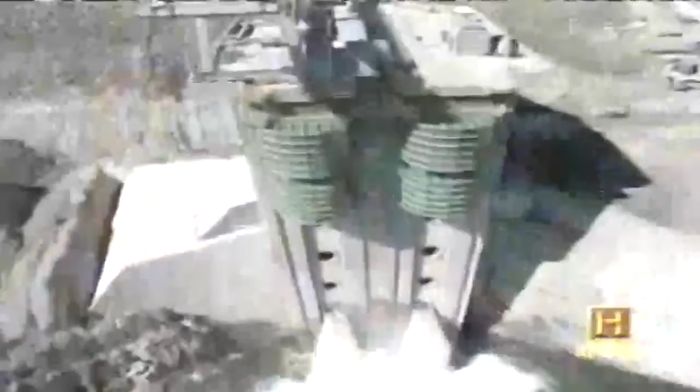When most Americans turn on a faucet, they expect clean, pure water to flow out. They also expect their city to have plenty of water for industries, for fighting fires, and for cleaning streets. Public water supply systems in the United States provide all those things for 99% of the population, over 250 million people. Water supply is empowering. There are so many things that can happen when you have a water supply, and so many things that don't happen when you don't have one.

On average, Americans use about 100 gallons of water per person every day, and public waterworks in the U.S. supply about 40 billion gallons daily. It truly is an invisible empire.

There are thousands of miles of these aqueducts and tunnels all underneath the city, crisscrossing and moving. There's very little space down there. They've built so much. The men who built the skyscrapers up have really built the skyscrapers down. Some of the technology used in today's city water systems has been around for millennia.

Sanskrit writings from 4,000 years ago talk about the importance of purifying drinking water and describe various methods, including boiling over a fire and filtering through sand or charcoal.

2,700 years ago, qanats—sloping tunnels carrying groundwater—were being used in northwestern Persia. The qanats are basically horizontal wells used for irrigation. These were developed originally in the area mainly what's today Iran, and spread throughout the area into places like Spain and parts of China.

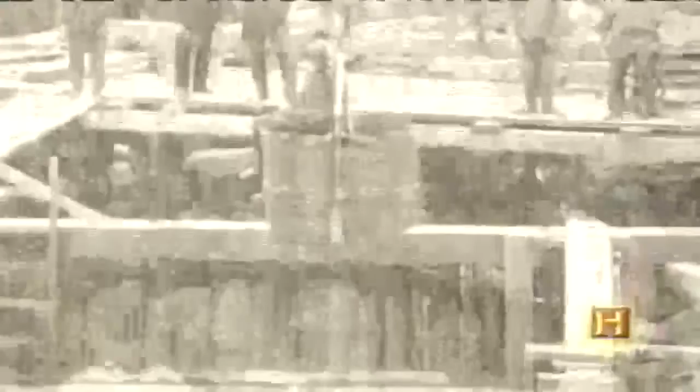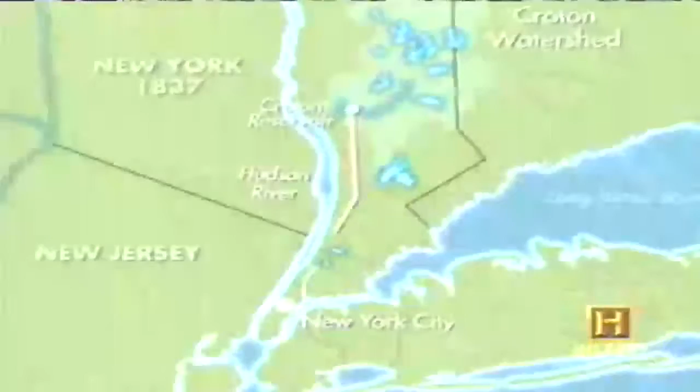In 1837, construction began on the Croton Aqueduct, which still carries water to New York City today, providing about 10% of the city's water supply. The 30-mile-long brick pipeline, extending from the Croton Reservoir along the east bank of the Hudson River to downtown New York City, took 5 years to complete, with up to 4,000 laborers on the job at one time.

In 1842, when the aqueduct finally went into service, President Tyler and former presidents John Quincy Adams and Martin Van Buren came to the Big Apple for the opening ceremony and watched water gush for the first time from the Croton Fountain near City Hall.

People recounted in elaborate fashion their first bath, their first shower. Things hard to imagine what it was like to be able to go into your house, turn on a tap, and have water. The Croton Aqueduct was considered an architectural marvel.

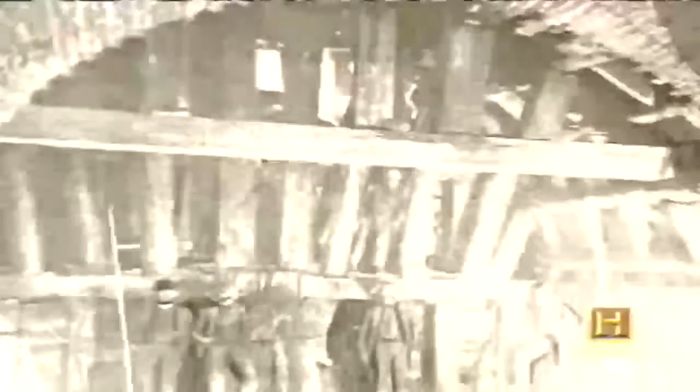Most of it was an 8 by 7 foot arched tube of brick and stone, buried 15 to 30 feet beneath the ground. But there were elevated sections like the High Bridge, an arched brick overpass that took the aqueduct across the Harlem River to Manhattan. It became a popular tourist attraction in the late 1800s, with sightseers traveling 8 miles from the city to stroll across the 1,400-foot-long span.

Then, as always happens, because of the supply of water, because of the nature of New York City, the city quickly expanded, and already within 12 years, there was an editorial in the New York Times saying, we need more water, we need more water. When you think of the immigration that was occurring in the end of the 1800s, New York was just exploding, and that Croton network just wasn't able to meet water supply demands.

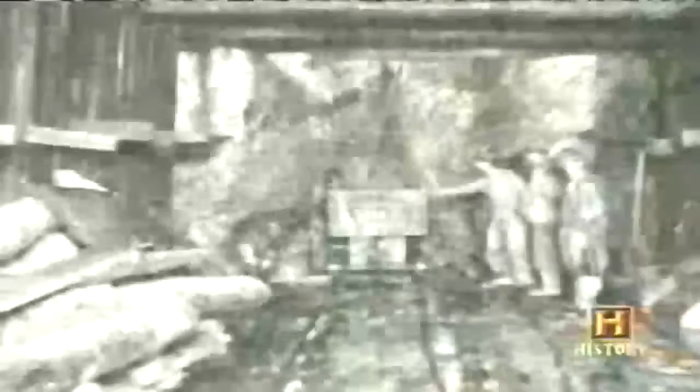And this time, they looked even further afield, and their plan and vision was even bolder. They decided to build an aqueduct all the way out to the Catskill Mountains. The new aqueduct from the Catskill Mountains would be 92 miles long, 3 times as long as the Croton Aqueduct. It would run down alongside the Hudson River and at one point cross the river. This is another hand-built aqueduct.

This was the working man down there with sticks of dynamite and steam locomotives and mules hauling all that rock out.

With the Croton Aqueduct, they decided to cross the river in the aqueduct above the river. With the Catskill Aqueduct, they decided to go beneath it.

For over a year, they would sit on these boats pitched in the river, often in storms and rain, trying to do soundings, trying to literally lower things down to figure out where the bottom of the river was so they could decide how far they had to dig down on the banks to get underneath it. At one point, engineers raised their hands in frustration and said, this river's bottomless.

But eventually the city's engineers did find the bottom of the river and made the daunting discovery that they would have to tunnel at a depth of 1,200 feet to get to the solid and stable bedrock beneath the river. It was a task that seemed impossible, but they would have to find a way.

What they didn't know is that the system they were building had an Achilles heel, a potentially fatal flaw that has New York City engineers worried today.

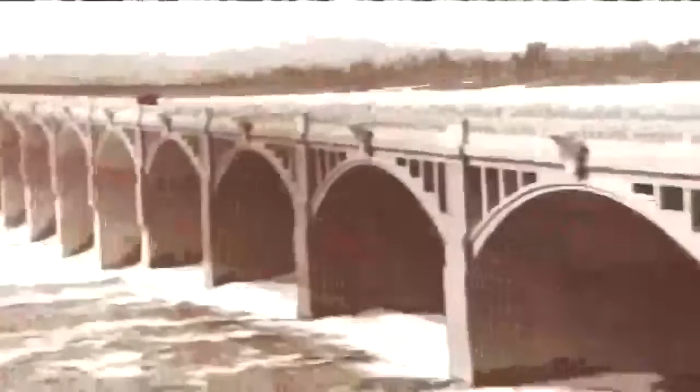When New York City water engineers set out in 1907 to build a new aqueduct from the Catskill Mountains, one of the most difficult challenges was digging a tunnel deeper than they had ever dug before. In order to cross underneath the Hudson River, they would have to tunnel at a depth of 1,200 feet, nearly as deep underground as the Empire State Building is high. So it gives you some sense of scale of how enormous the engineering was to do this.

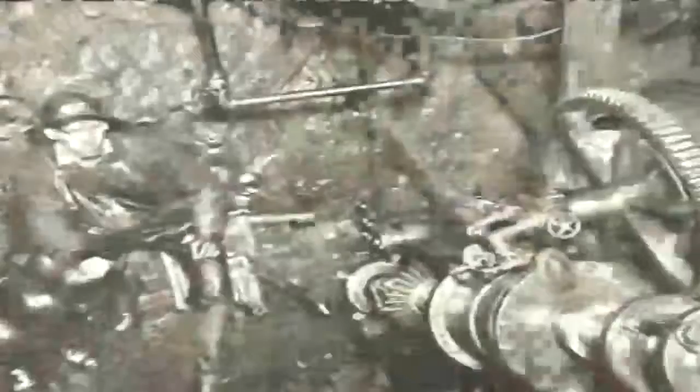So what they did is they started to dig from both banks, literally from the sides, and they began to dig like an inverted triangle coming down until the two sides literally met 1,200 feet beneath the river, almost like a pincer.

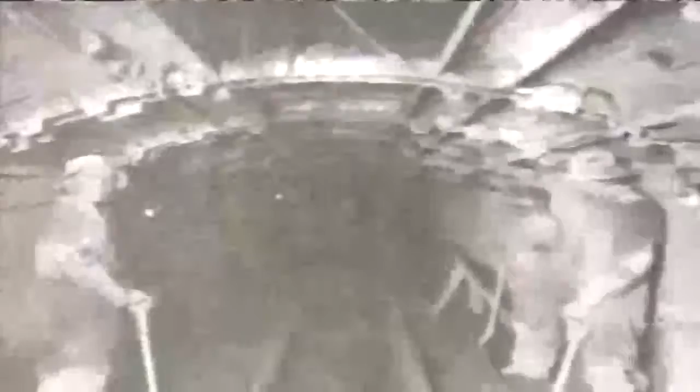After crossing under the Hudson River, the new aqueduct would flow into City Tunnel Number 1, a huge new tunnel that would run the length of Manhattan, 900 feet deep. Work on the 18-mile-long Tunnel Number 1 began in 1911 and went on for 6 years. When completed, it would be the longest tunnel of its kind in the world, capable of carrying 500 million gallons of water per day.

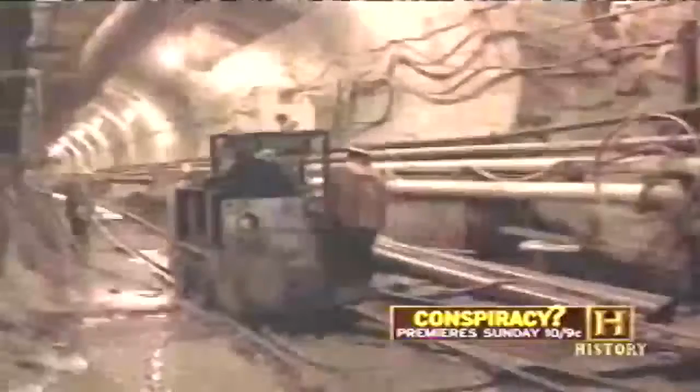The workers of Tunnel 1 were members of a proud profession that continues to build the New York City water system today. Known as sandhogs, they've been laboring underground, unknown to most New Yorkers, for decades. They got the name from their work in the sandy bottom of the East River, laying foundations for the Brooklyn Bridge.

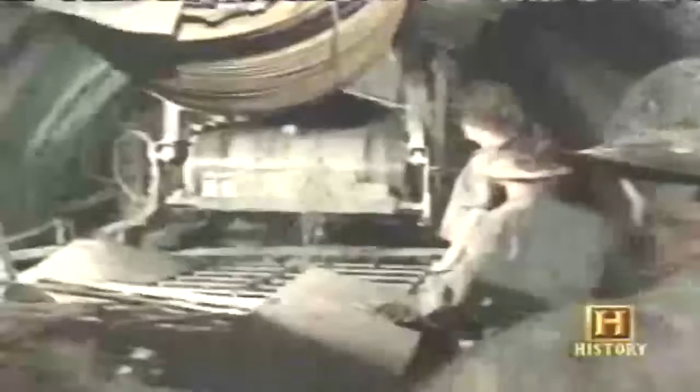Starting at the absolute bottom of the economic ladder, it was the hardest, toughest, in a sense, most dangerous job out there that you could find. Fathers passed on those job opportunities to their children, and a culture grew out of that.

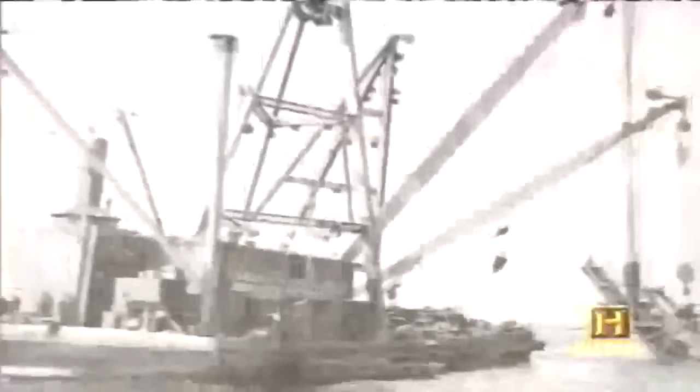Construction of the 11 to 15-foot diameter tunnel was particularly dangerous where it crossed the East River to carry water to Brooklyn. Natural groundwater made the ground so soft that the shafts in which workers descended to the tunnel became watery death traps. Every time they would dig, the soil would cave in on top of them.

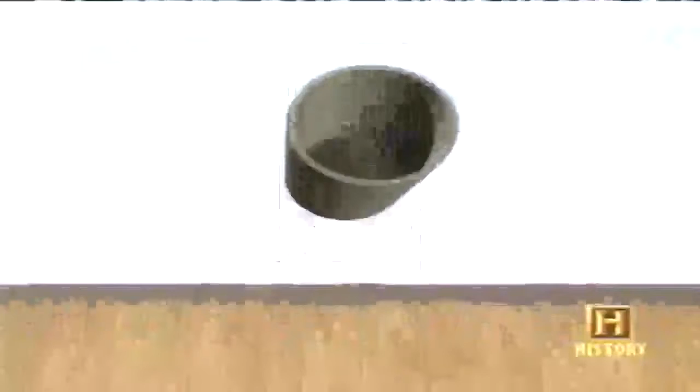So what they decided they needed to do was to sink something called a caisson. Pneumatic caissons filled with pressurized air had been used earlier in the building of the Brooklyn Bridge. These concrete and steel structures weighed about 2,000 tons each. They were sealed on all sides except the bottom, and as they were lowered into the soft ground, compressed air was pumped in, pushing out the mud and water.

That pumping of the air created a real safety health hazard because it created an environment where the workers would get the bends, so they were only allowed to be down there for 2 hours. The bends, also known as caisson disease, can happen when pressure on the body is removed too quickly, causing the formation of nitrogen bubbles in the blood and tissues.

Sometimes the intense air pressure would cause a dangerous blowout in the walls of the caisson. It was basically a high, shrill, kettle-like screeching, which would echo in the caisson. It meant there was a rupture in the lining of the caisson wall, that the air was now escaping, created an incredible suction, and everything in the tunnel was going to be sucked towards this small opening.

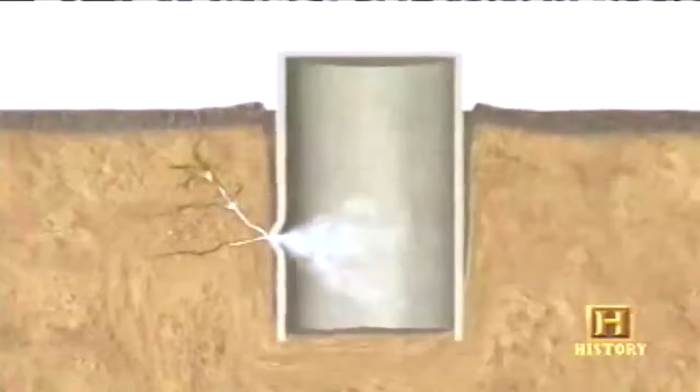Because of the pressure, the opening could widen very quickly, and everyone would drop their picks and run. Most of the concrete-lined Tunnel Number 1 had to be blasted through solid rock. During the first 3 years of construction, 10,000 pounds of dynamite were used daily.

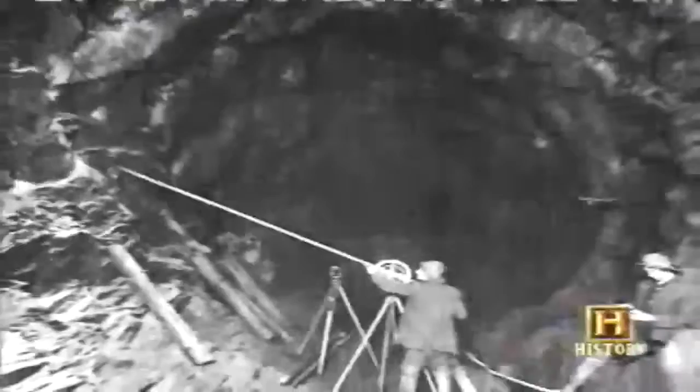By the end of 1912, a total of 2.5 million pounds of dynamite had been used, and 14 workers had died in blasting accidents. The tunnel was finally finished in 1917, and a lavish opening ceremony was planned at a fountain in Central Park. Entitled The Good Gift of Water, the pageant had to be canceled because of rain.

Tunnel Number 1 was an engineering triumph, but for a city growing as fast as New York, it would be inadequate within a few years. Over the next decade, population expanded eastward from the Bronx and Manhattan, and by 1929, water consumption was 35 million gallons a day higher. Construction began on Tunnel Number 2 to supply Brooklyn and Queens.

The tunnel would be fed by a new aqueduct from the Delaware region. It connects with City Tunnel Number 2, which, together with City Tunnel 1, delivers all of New York's water to 8 million people in New York City. Obviously, they are of crucial importance. Without one or the other, half the city would be without water.

In the 1950s, New York City water engineers made a disturbing discovery when they tried to shut down a section of City Tunnel Number 1 to inspect it. They had built valves in the bottom of shafts, and these valves they would literally turn — they would almost look like a steering wheel on a submarine, sticking out of a hatch. So in 1954, the engineers go down and start to turn the handle.

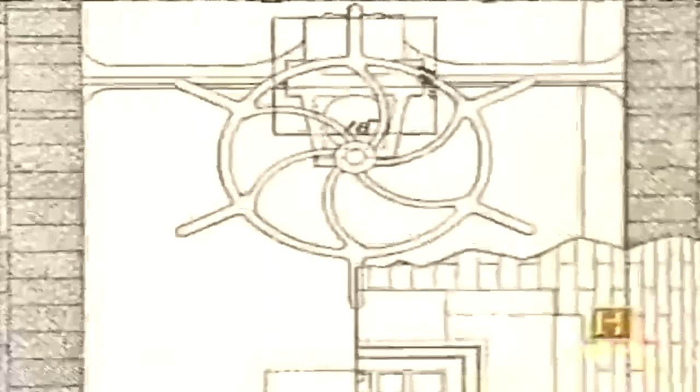As they start to turn the handle, it begins to tremble, begins to shake. There's too much pressure on it. It's too old, the valve's corroded. They can't shut it off. They couldn't repair it, they couldn't even find out if it was about to burst or break. It scared the bejesus, as one engineer told me at the time, out of everybody.

If you lose this system, something that New Yorkers take for granted day in and day out, you'd have a very different New York City without water. And that is a daunting challenge, one that makes the third water tunnel so critical. City Tunnel Number 1 has been in continuous use without a shutdown for inspection or maintenance for well over 100 years. Hundreds of sandhogs are now fighting a crucial battle to complete a new tunnel as quickly as possible.

There's no way to bring water to Lower Manhattan or from 59th Street down without Tunnel Number 1. Once we finish constructing the third water tunnel, we'll be able to turn off the first water tunnel, get in there, and look at what its engineering challenges are for something that's 100 years old.

People forget everything breaks at some point. A 100-year water tunnel at some point starts to fail, and you're now seeing the kind of snap, crackle, and pop within that system. Some of the sandhogs building Tunnel Number 3 believe the only thing preventing Tunnel Number 1 from collapsing is the pressure of the water pushing against its walls.

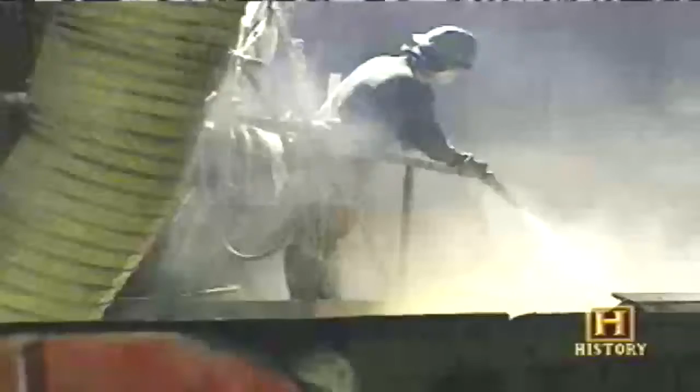One of the engineers and contractors told me, probably more starkly than anyone else, that what nobody knows is that we're facing a potential apocalypse. Those were his direct words. And so once again, an enormous project began, in 1970. It became, for those who understood it, a race against the clock.

No one understands that race better than the sandhogs of today, who are building City Tunnel Number 3, many of whom come from a long line of tunnel workers. My uncle, my cousin, they were all sandhogs, and then you join with them. I've been a sandhog for 27 years. When I went down there the first time, it was exciting — I said, wow.

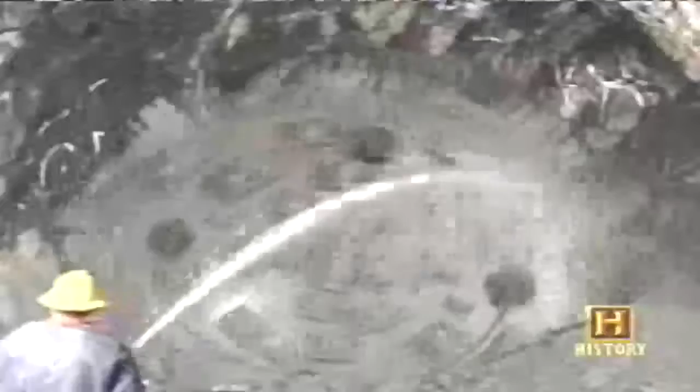Sandhog Scotty Chessman has a PhD in geology. After working as a geologist for the city, he decided to go back to the job he loved best. When you get down there, it's the root core of the Appalachian Mountains, anywhere from 1 billion years ago to 400 million years ago. You see a beautiful cross-section of what it was like — the physical activity that took place, the deformation, the heat and pressure, and the imprint on the rock.

And it changes as you go along. You know, it's almost a PhD thesis every 100 feet.

The 60-mile-long tunnel number 3 will extend from Yonkers through the Bronx down to the southern tip of Manhattan, and then over to Brooklyn and Queens. Longer, wider, and with more sophisticated control systems than its two predecessors. Its construction ground to a halt for nearly a decade after New York City went bankrupt in 1974, and it's not scheduled for completion until 2020.

It's being carved out by a gigantic machine, similar to the one that dug the Channel Tunnel from Britain to France, called a TBM, or tunnel boring machine. It has a large head, 13 feet roughly in diameter, with a bunch of cutters on it, and they press up against the face at 1.5 million pounds of thrust, which comes out to roughly 65,000 psi per cutter.

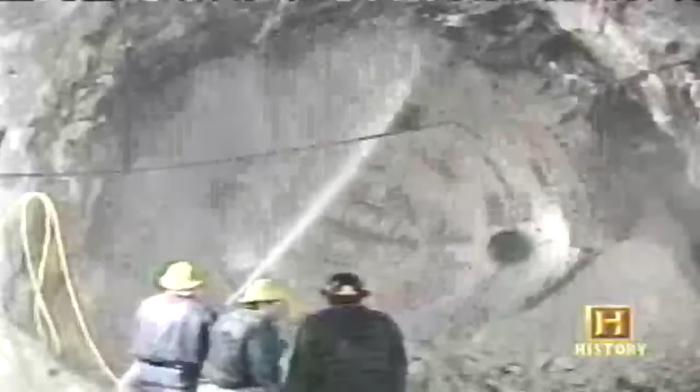This tunnel boring machine has these large grippers. It locks out on the wall. It has these large hydraulic cylinders that push the head forward, and the head rotates and presses on the face and creates these chips.

As the TBM moves forward, it's up to the sandhogs to clear out the chipped rock it creates, which is called muck.

Now this is the actual muck. This is the last conveyor of the system, you see. And it's muck. You can see some chips in it, but it's pretty finely ground. So the muck you're seeing right there probably came from the heading 8,000 feet ahead of us, probably 20 minutes ago.

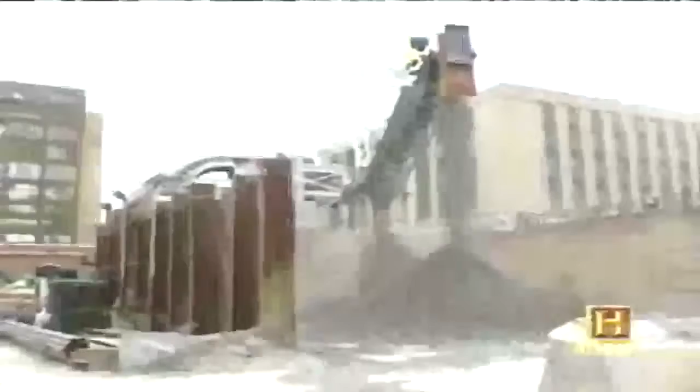Whenever the sandhogs prepare to descend to their workplace deep beneath the city, they're aware of the dangers involved, and that awareness keeps them alive. Five guys that I've worked with have been killed on the job, and then here, a lot of guys have been maimed, and it's sad that it happens. I don't want it to happen to me, and they didn't want it to happen to them, but sometimes things happen. Safety's a big issue. Everybody wants to go home.

There's always one last thing to do before getting on the elevator for the 600-foot trip down. This is a check-in, check-out board. It's an OSHA requirement. If there's ever an accident down there, we'd like to know how many people are down there, in case you have to rescue anybody. So it's a requirement that you flip over your tag. As I'm going in, I'll flip over my tag for red, and that indicates that I'm in the tunnel.

24 sandhogs have died in the construction of tunnel number 3. Some believe they may have given their lives to prevent a catastrophe. If one of those systems collapsed over the next 20 years, it would be a disaster of mega proportions that would overshadow all the disasters combined. It would truly be a calamity.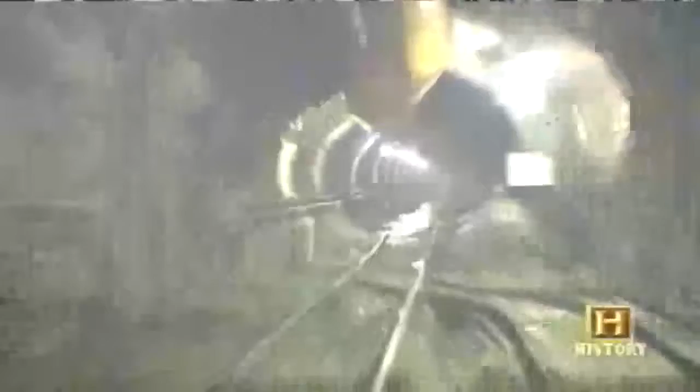The stakes are as high as they've ever been. They're as high as they were in the 1830s. People just don't realize it because the water is still flowing. While we're building the third water tunnel, we definitely and unequivocally do not expect catastrophic failure in the near term. But if you don't do it now and you don't start building it now, it's definitely not going to be a place where that risk is really facing the city.

The city of Chicago has never had to look far for its water supply, since it's situated on one of the Great Lakes. But it did have to build the largest purification plant in the world to keep its drinking water clean.

New York City residents consume an average of 1.1 billion gallons of water a day. That's about 300 million gallons less than in 1988, when the city launched a major conservation campaign.

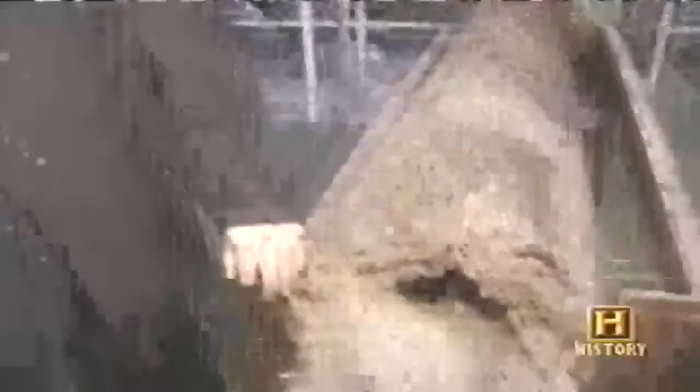This is a wood water main, which we estimate to be over 100 years old. It's typical of what it was prior to 1850. This one appears to be coated with some type of tar, which would probably be typical of what they would do when they installed them.

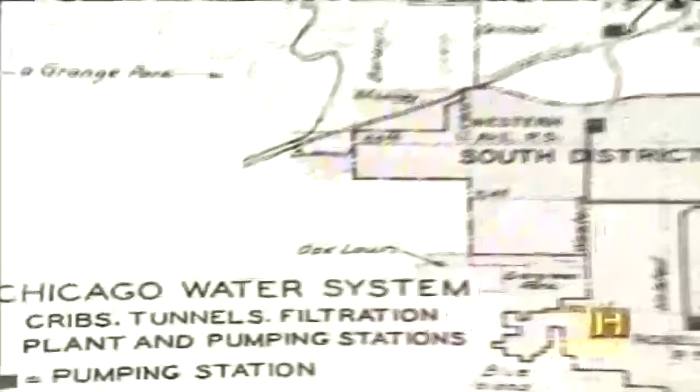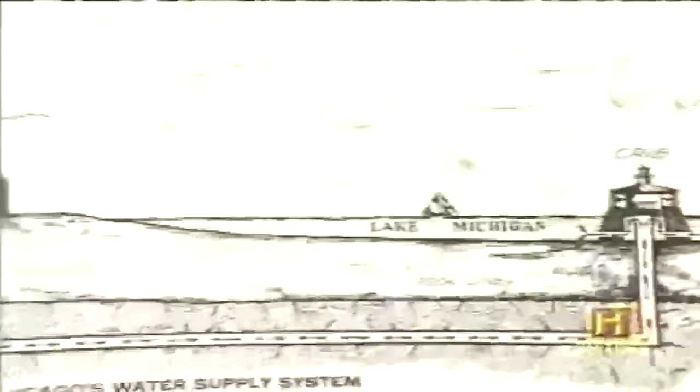In 1864, the city started construction on an engineering project that made headlines around the world: a tunnel that extended 2 miles out into Lake Michigan, the longest tunnel ever bored up to that time. The tunnel was dug through clay 60 feet below the lake's bottom and was lined with brick to a finished diameter of 5 feet. A pentagon-shaped wooden building called a crib, which would protect the intake shaft from ice and the elements, was built onshore, towed out into the lake, and sunk to the bottom.

The term crib came from the wooden pilings which were sunk into the lake bed. 30 years later, the wooden building was replaced with a brick one, but the term crib remained, and the Carter Harrison crib is still there today. The Chicago Water Department tug, which is also an icebreaker, makes regular trips to maintain it.

Modern Marvels went aboard with Richard Rice, the head of the Chicago Water Department, for a trip to the Harrison crib, which looks much as it did when it was built over 100 years ago.

Plaster walls, wood trim. We have living quarters for about 19 individuals who may be out here at any given time during the year to do work.

In the early days, there was always somebody at home at the crib. We actually had a crib tender - that was actually a title in our budget, a crib tender who lived here 24 hours a day. Rumor has it that they had the best meals in town cooked out here.

The shore end of the tunnel was connected to a new pumping station that opened in 1869. It had the capacity to pump 18 million gallons a day, which was 60% more than the city needed at the time.

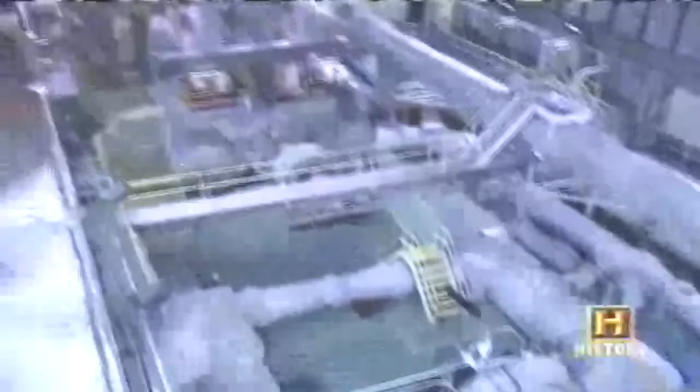The Chicago Avenue pumping station is still an essential part of the downtown water system, with a total of 6 working pumps that can produce 200 million gallons a day.

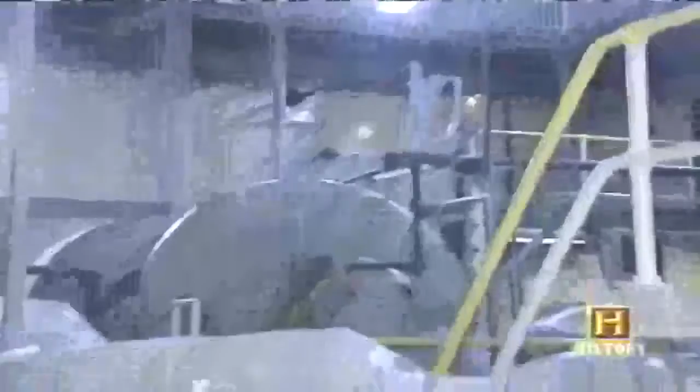The original pumps were steam-driven. We've converted and modernized the station. These are one of our older electric pumps. This pump that we see here will be pumping 30 million gallons per day.

The Chicago Avenue pumping station, which now includes a restaurant and a theater, and the historic water tower across the street, have become major tourist attractions in downtown Chicago.

For a while, the 2-mile-long water tunnel under Lake Michigan provided an abundant supply of clean, fresh water for Chicago. But as the city grew, tanneries, glue factories, and other new industries belched effluent directly into the Chicago River, which was already polluted with sewage. By 1890, Chicago sewage was flowing all the way from the Chicago River to the intake crib 2 miles offshore. Chicago was hit by outbreaks of dysentery and typhoid.

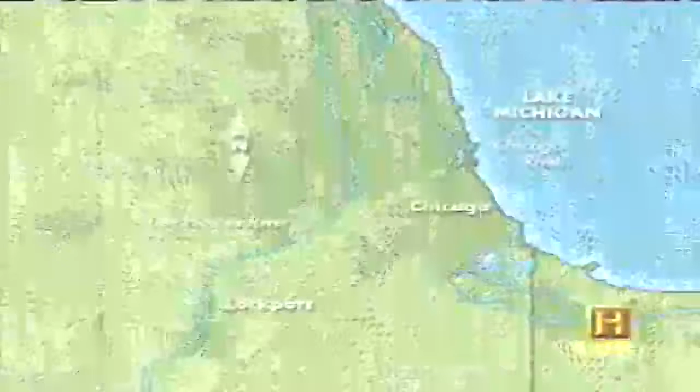To keep pollution out of the lake, the city broke ground in 1892 on the largest earth-moving project of its time, the 28-mile-long sanitary and ship canal, which was larger than the Suez Canal in Egypt. The canal reversed the flow of the Chicago River, making it the first river in history to flow away from its mouth.

8,500 laborers used mule-drawn plows, steam shovels, and dynamite to move nearly 30 million cubic yards of earth. Reversing the river's flow led to a dramatic reduction of pollution in Lake Michigan, and by 1908, Chicago's typhoid rate had dropped 91%. Chicago eventually built more intakes in cribs to bring water from Lake Michigan.

They include the still functioning Dever Crib, located beside the old Harrison Crib, and connected to it by a steel walkway. In 1935, the Dever Crib was completed, and that was actually a 16-foot concrete-lined pipe that actually is beneath the floor of Lake Michigan at a depth of about 150 feet.

The Harrison Crib, taken out of service in 1998, still serves as the living quarters for maintenance crews working on the Dever Crib. As Chicago's population grew, a large purification plant became necessary. The Jardine Purification Plant, designed to filter and treat more than 1 million gallons of water per minute, was completed in 1964. It's the largest water treatment plant in the world.

Huge pumps bring lake water from the Dever Crib into the plant, where it goes through a vast system of sand and gravel filters to remove impurities, called particulate. Each one of these filters is a conventional rapid sand filter. It's basically a couple feet of gravel topped by a couple feet of sand, and the water travels through the sand and is filtered. It will trap most of the particulate on the top.

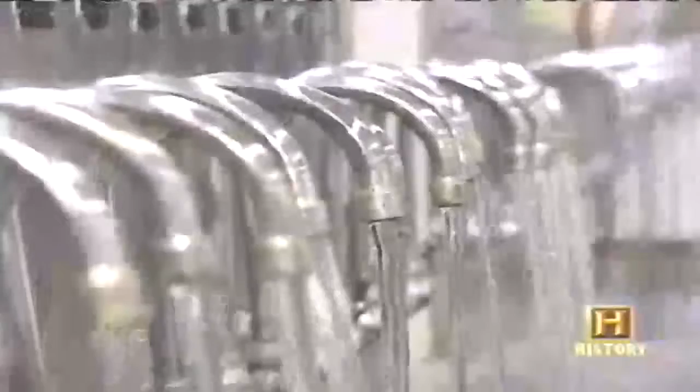In the plant's testing laboratory, technicians perform numerous tests to monitor the quality of the water 24 hours a day, 365 days a year. Millions of samples are taken at the plant every year to ensure that the water meets the standards of the Safe Drinking Water Act.

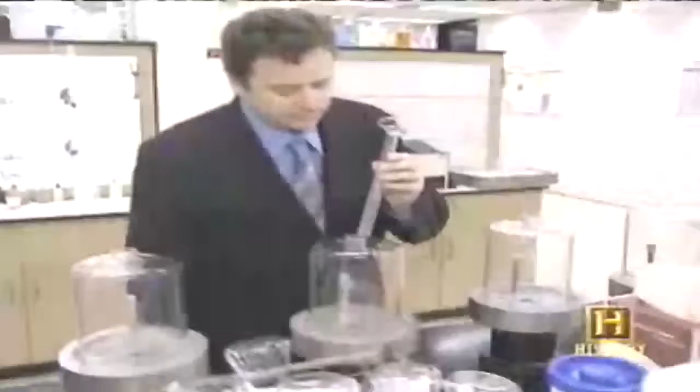The incoming raw water is also monitored for unpleasant tastes or odors. With the odor monitors, we basically use the human nose. In raw water, you may smell an earthy smell, you may smell a fishy smell, you may smell a moldy smell, you may smell a chemical or a phenol smell.

If the water fails the sniff test, the Jardine plant will add powdered activated carbon, which can remove tastes or odors. Tiny carbon particles are extremely absorbent, like sponges.

After the water has completed the treatment process, it flows by gravity through our outlet tunnels to our 12 pumping stations located throughout the city.

Chicago's location on Lake Michigan means it has a huge supply of fresh water on its doorstep. Los Angeles has no such luck. So finding the water necessary to turn this patch of semi-arid land into America's second largest city has never been easy.

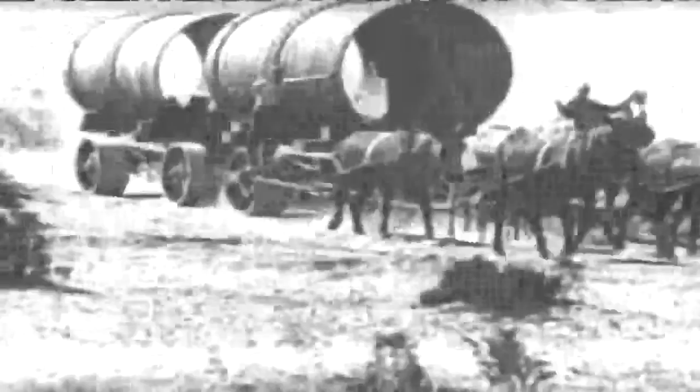The Chicago Avenue Pumping Station and Water Tower were the only public buildings to survive in the area destroyed by the Chicago Fire of 1871. City water will return on modern marvels.

Diamond Valley Lake Reservoir, about 80 miles east of Los Angeles, was the largest earthworks construction project in U.S. history and one of the boldest ideas for water storage ever conceived. The Metropolitan Water District and the engineers there looked at what was essentially a ring of mountains and said, what if we connected them? And so they created a bowl that is elevated to the mountaintops. It's an extraordinary idea. Unlike most dams, a river does not run through it.

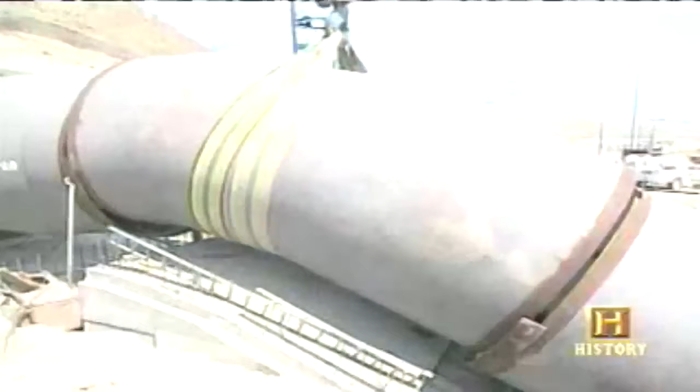Water for the huge reservoir comes by pipeline from the state water system in California's Central Valley and from the Colorado River. The Diamond Valley Lake Reservoir has doubled the water storage capacity in Southern California.

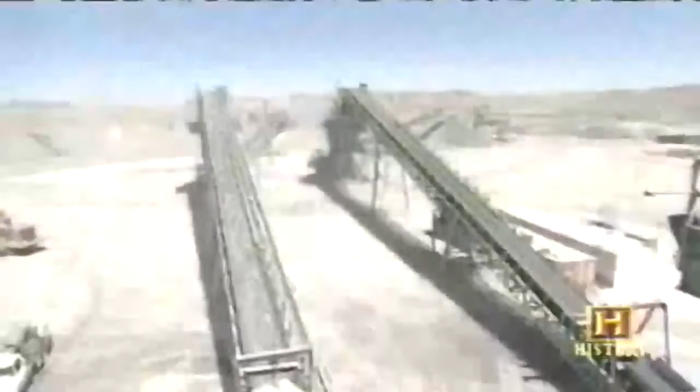Construction began in 1995, and the reservoir was completed 5 years later. $100 million worth of earth-moving equipment, including some of the largest dump trucks in the world, was used to carve out nearly 150 million cubic yards of soil and rock.

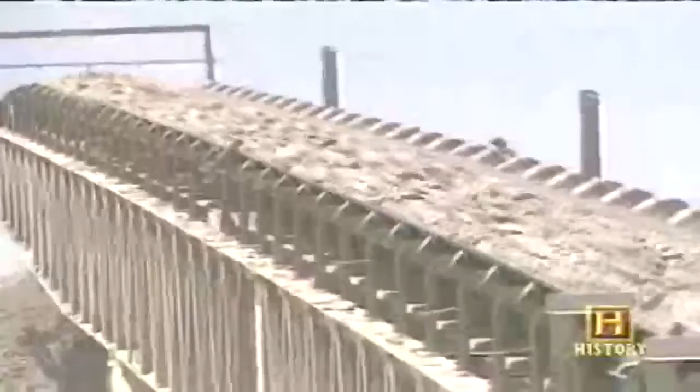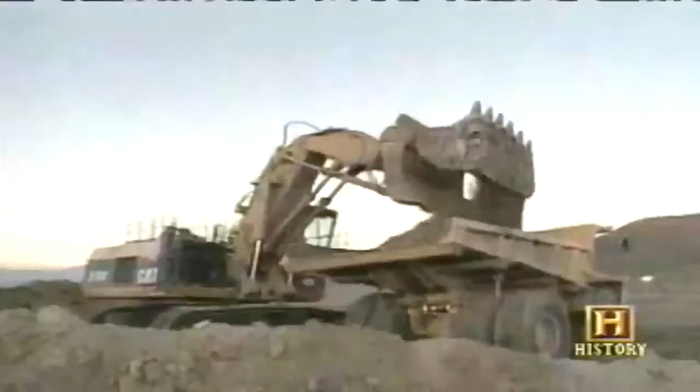When you put that on a scale of those kind of projects that have been done worldwide, that's seventh largest in the world in terms of moving that amount of material, but we did it quite fast. And we were moving enormous volumes of earth and rock every day, 20 hours a day, 6 days a week for 4 years to do that.

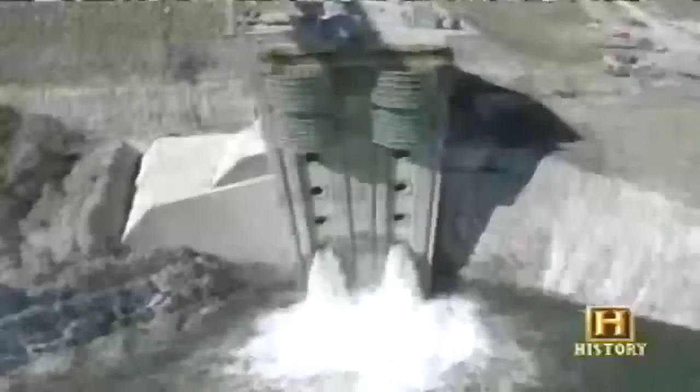Once the dams were completed, the next step was to fill the reservoir with water. With a capacity of over 250 billion gallons, it took more than 2 years to fill it up.

The Diamond Valley Lake project includes a large pumping station to get the water into the reservoir. The pumps actually draw off that smaller lake, or that pumping pool, and push water through the mountain that we're standing on to an outlet tower, which allows the water to be delivered into the lake.

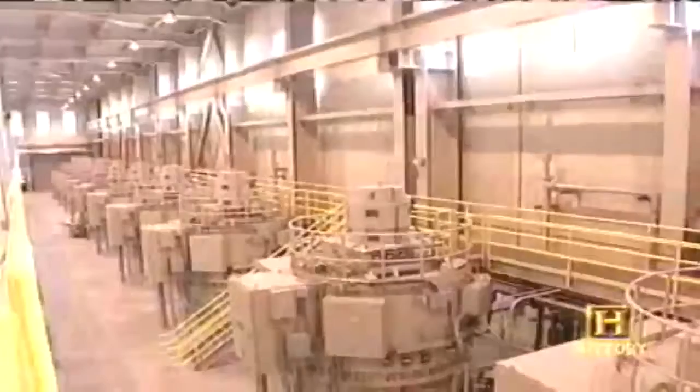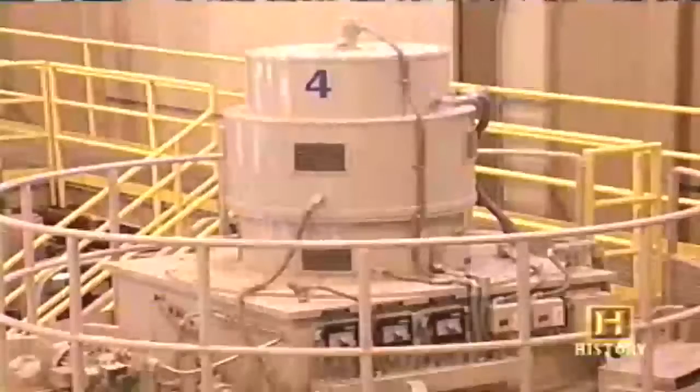The pumping station contains some of the largest variable speed electric motors that have ever been built. The variable speeds allow them to adjust to changing water levels in the reservoir. Motors can also function as generators when the flow of water through the pumps is reversed.

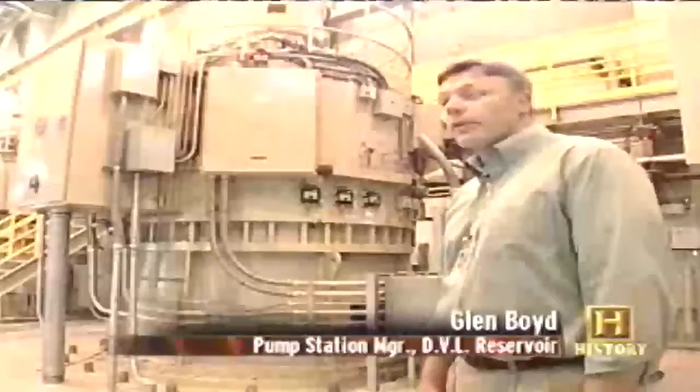Each of the 12 motors is a Westinghouse 6,000 horsepower motor. They were built in Texas, and they were transported here and then placed on top of the Mitsubishi pumps. They're capable of pumping 175 cubic feet per second. Now, the unique thing about these particular units is they're also capable of running in a generator mode, in which case we can produce 3.3 megawatts of electricity when they're in gen mode.

The Diamond Valley Lake project is a visionary investment in the future. As with projects launched by California water planners decades ago, it's expected to pay huge dividends.

If ever there was a city built by water, it's Los Angeles. We've always used water in California as a means of removing the natural limits. Clearly, God never intended large numbers of people to live in the Los Angeles basin—it's a semi-arid plain. Yet the accidental truth about the development of California is that everyone came west initially for the gold rush and then turned left, going south to the area where the water was not.

The story of the early growth of the LA water system is largely the story of one man, William Mulholland, the first director of the city's water department. He was an immigrant from Ireland who first worked as a ditch tender for the city—very rough, uneducated, not trained as an engineer, but supremely confident. By age 31, Mulholland was head of the Los Angeles Water Department and searching desperately for new sources of water for the city's growing population.

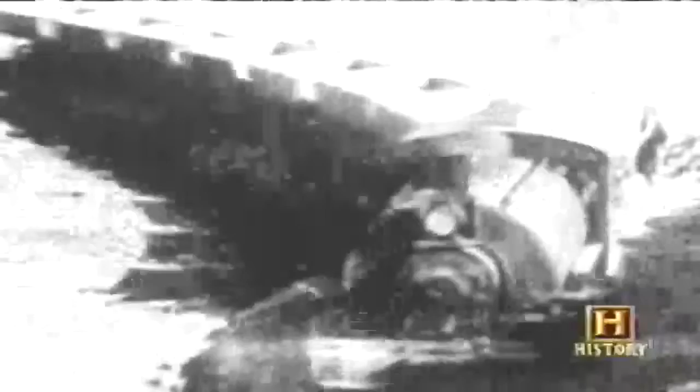That water would come from the Owens River, more than 200 miles to the north. Construction on the 233-mile-long Los Angeles Aqueduct began in 1908, after a newspaper campaign to get Los Angeles residents to support a public bond issue to pay for it.

Simultaneously, the city fathers announced the existence of a drought that no one had noticed before. But in order to float the bonds necessary to secure voter approval, it wasn't enough simply to say there was an abundant supply available for future needs. What followed was a largely fraudulent campaign, as it turns out—but only the first of many—by which the fear of an impending drought was used to create popular support for new waterworks.

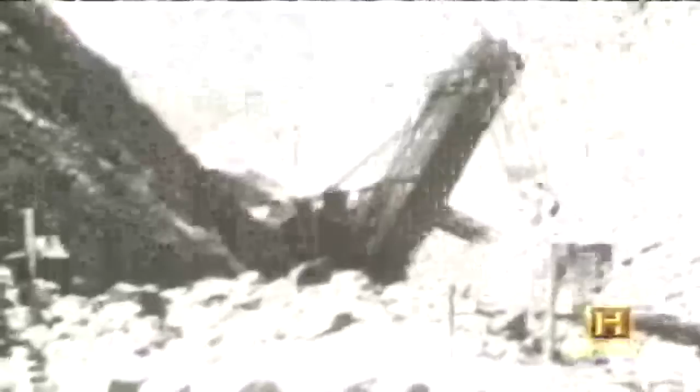With the financing in place, construction finally began on 34 miles of open unlined channel, 39 miles of concrete channel, and 98 miles of covered concrete conduit. Some of the conduit was big enough to drive a car through. Six million pounds of blasting powder were used to build the aqueduct.

When it finally went into service in 1913, bottles of Owens River water were handed out to the 30,000 celebrants who traveled by car, wagon, and buggy to the opening ceremony at the San Fernando Reservoir, north of the city center. Although residents of Los Angeles welcomed the new water supply, farmers in the Owens Valley weren't too happy about having millions of gallons of their water siphoned off daily.

In 1923, both the city and the Owens Valley area were experiencing water shortages. Confrontations escalated, and there were incidents of sabotage. During the 1920s, there were 10 attempts to blow up the aqueduct with dynamite.

The construction supervisor at Diamond Valley Lake, Dennis Majors, recalls his grandfather's stories of patrolling the aqueduct on horseback with a rifle to prevent sabotage. They had to get out there every day early in the morning, starting at 5 o'clock, and head 25 miles in one direction, patrolling that thing. They did tell me, well, they never had to arrest anybody, but they probably got close from time to time. He carried an old 1870 Winchester 25-35 with a scabbard on his horse, and maybe that's had some effect on not having to arrest anyone.

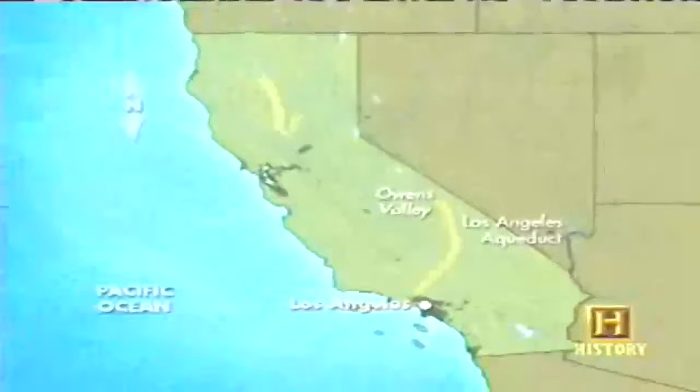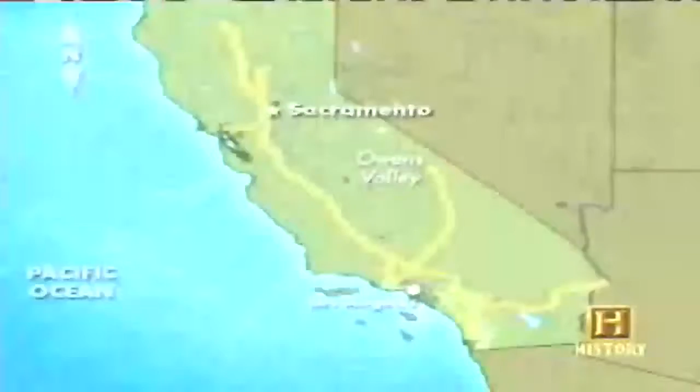Because of the city's huge population growth, Los Angeles now relies on a complex system that delivers water not only from the Owens Valley, but also from the Sacramento and San Joaquin rivers via the California Aqueduct, and the Colorado River via the Colorado River Aqueduct. These water sources are coordinated by the Metropolitan Water District of Southern California. Formed by Los Angeles and surrounding municipalities in 1928, the MWD now encompasses an area from Ventura in the north to San Diego in the south.

Not just Los Angeles, but its child, the Metropolitan Water District, have always built way ahead of demand, have more water than they are likely ever to need, and have been able to survive the droughts that have struck California in the last 20 years in far better condition than many other parts of the state.

One huge untapped source of drinking water for California is the Pacific Ocean. Desalination plants can change seawater into fresh water, but the only plant doing it on a large scale is 3,000 miles away from Los Angeles.

The Metropolitan Water District of Southern California provides residents with up to 800 billion gallons of water every year. City water will return on Modern Marvels.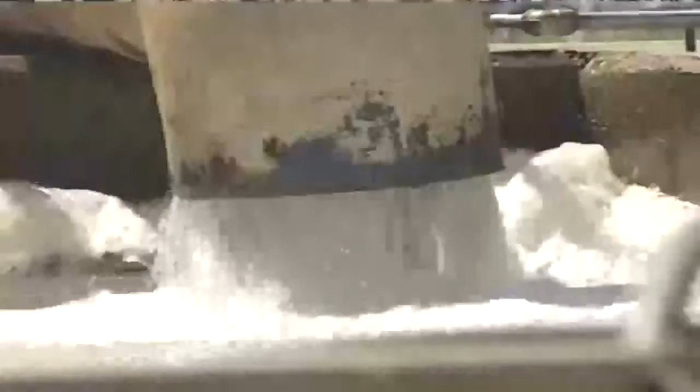The water desalination plant is the only operating seawater plant of its kind in the country. The plant serves about 2.5 million Florida residents in Tampa, St. Petersburg, and the surrounding area, providing 10% of the fresh water supply, or about 25 million gallons a day.

To change seawater into drinking water, the plant uses a process known as reverse osmosis, or RO.

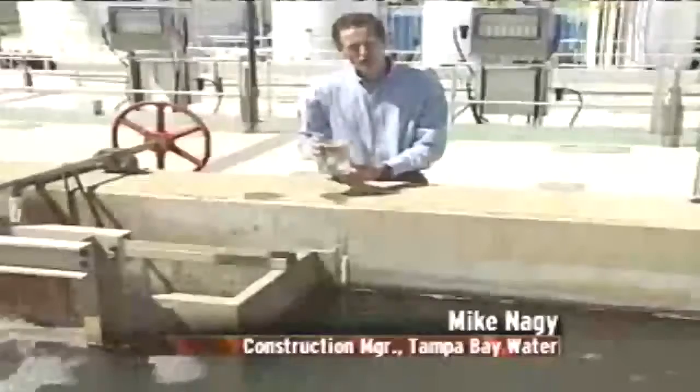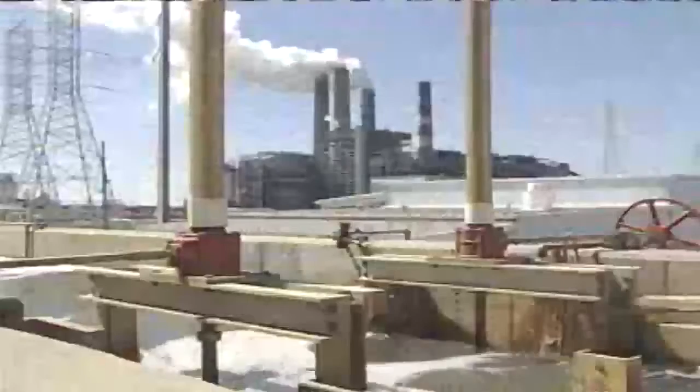This is raw seawater, before it goes into the first stage of the filtration system, the sand filters. The sand filters are the next stage of filtration before the water gets into the RO process. The water is pumped through filters to remove impurities before entering the reverse osmosis system.

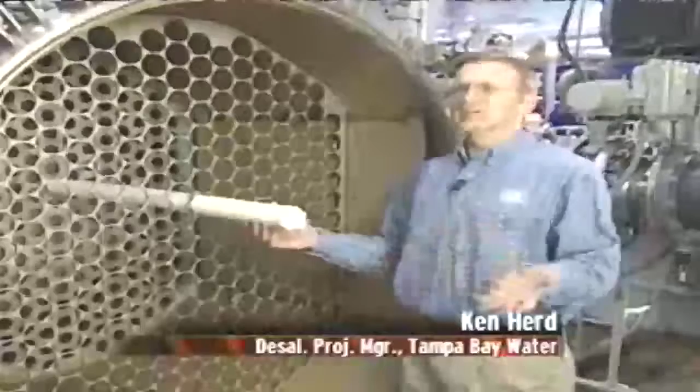These are 5-micron cartridge filters made of a yarn-like substance. These filters are able to capture any suspended solids that may make their way through the sand filters. We don't want any suspended particles passing beyond this point in the process, because that could result in fouling of the reverse osmosis membranes.

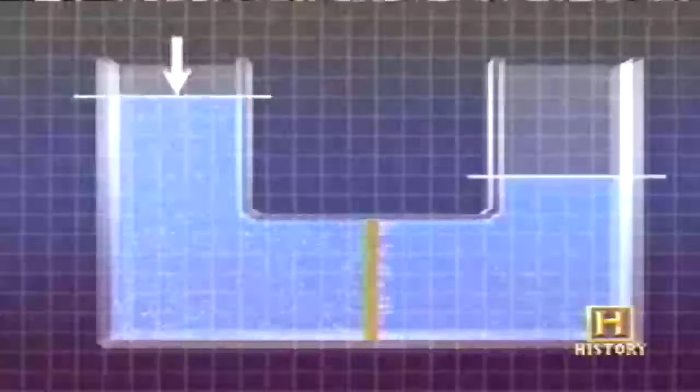In regular osmosis, when two water volumes are separated by a semi-permeable membrane, water will flow from the side of lowest concentration of soluble matter, like pure water, to the side of highest concentration, like salt water. In reverse osmosis, pressure is exerted on the side with the concentrated solution, the seawater, to force water molecules across the membrane to the freshwater side, in effect filtering out the salt.

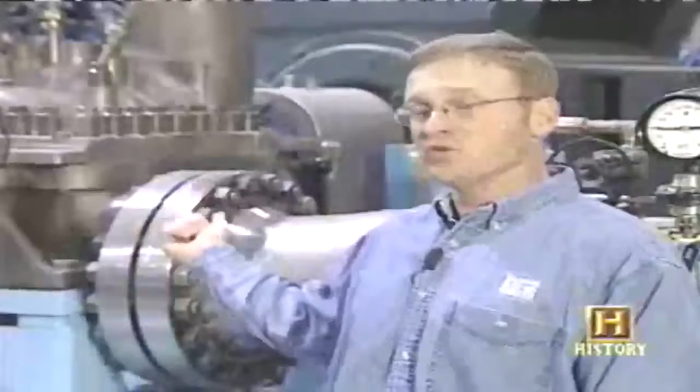Following the cartridge filtration step, the saltwater pressure is boosted with this 2,000 horsepower high-pressure pump. That pump pressurizes the water up to 1,000 pounds per square inch. That's enough pressure to pass on to the membranes, which is really the heart of the reverse osmosis process.

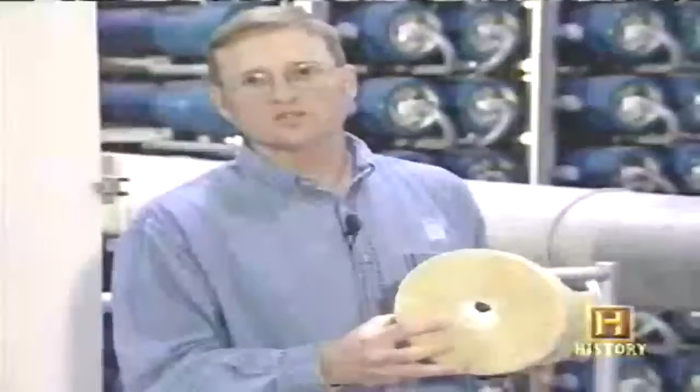Each one of the blue pressure vessels contains 8 reverse osmosis tubes. This is a cross-section of a reverse osmosis membrane. The salt water, under high pressure of 1,000 pounds per square inch, is passed into the membrane. That high pressure forces the fresh water through the membrane, leaving behind a salty, concentrated solution. In the entire plant, there are 10,000 reverse osmosis membranes. If you unrolled all these membranes and put the membrane surface area back to back, it would stretch for 223 miles. The concentrated seawater left over from the desalination process is diluted and released back into the ocean.

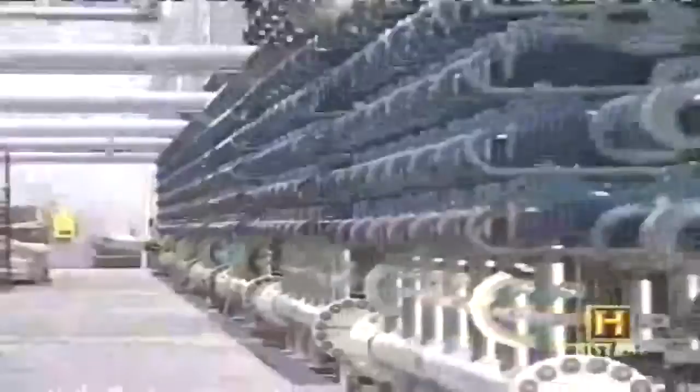The desalination project at Tampa Bay is being studied closely by other water departments across the U.S., including the Metropolitan Water District of Southern California.

The question will be when we go there, not whether we go there, in my opinion. A seawater desalination program in Southern California could be a very important complement to the other water resources, so that when we have droughts, or if we had an earthquake that knocked out one of our pipelines from the Colorado River or the State Water Project, you have a palette of resources you can draw upon, and seawater desalination would be a nice complement to that.

As fresh, pure water becomes an increasingly valuable resource, some experts are calling it the new oil, and predicting that wars may someday be fought over it. Ideas that would have been considered bizarre a few years ago are looking increasingly viable.

A Greek company, Aquarius Water Transportation, has been supplying fresh water to several Greek islands using huge floating plastic bags. The bags, towed to the destination by tugboat, can each hold nearly 8 million gallons of water.

Another company has proposed wrapping entire icebergs in plastic and towing them to locations that need water. 70% of the Earth's fresh water is locked up in the polar ice caps from which icebergs are formed.

People have been talking about icebergs for a long time. It's sort of a captivating idea, and there are certainly areas of the world that have limited options, and towing an iceberg to areas of the Middle East or even some islands in the South Pacific that are limited in their water supplies could be very attractive.

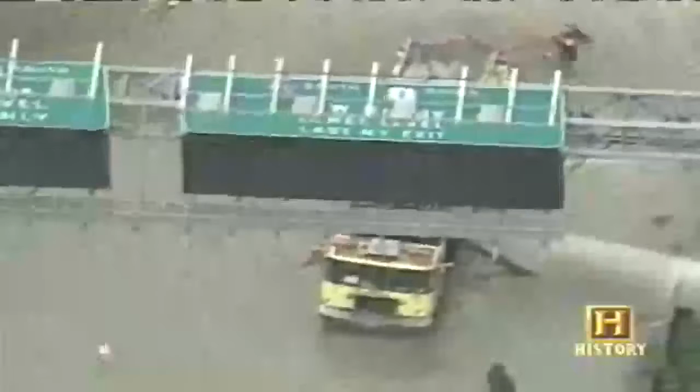Construction on the renowned aqueduct system of ancient Rome began—an extraordinary feat of engineering. They brought water to the city from as far as 57 miles away. Over a period of 500 years, 11 aqueducts were built to bring water to Rome, and some sections are still functioning today.

Ancient Mayans in the Yucatan Peninsula got their fresh water from naturally formed underground sinkholes called cenotes, to which they attached great religious significance. The Maya considered the cenotes portals to the underworld, where they would journey in the afterlife to meet gods and ancestors.

Probably the most well-known one is the cenote at the big site of Chichen Itza in Yucatan State. This has yielded a tremendous amount of materials—offerings that were tossed in over the years: fancy pottery, and very late in the history, gold, and...

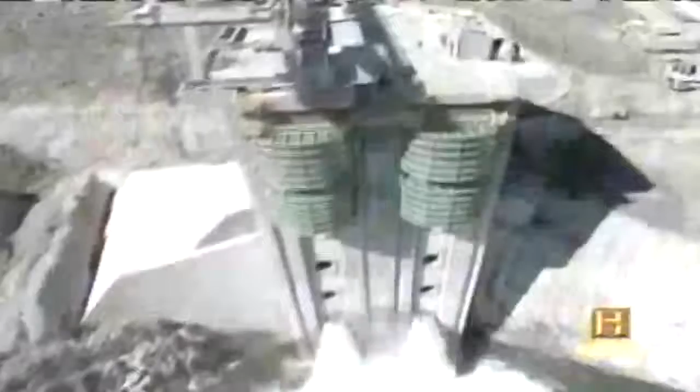Most of us take them for granted until there's a problem. When most Americans turn on a faucet, they expect clean, pure water to flow out. They also expect their city to have plenty of water for industries, for fighting fires, and for cleaning streets. Public water supply systems in the United States provide all those things for 99% of the population—over 250 million people. Water supply is empowering. There are so many things that can happen when you have a water supply, and so many things that don't happen when you don't have one.

On average, Americans use about 100 gallons of water per person every day, and public waterworks in the U.S. supply about 40 billion gallons daily. It truly is an invisible empire—there are thousands of miles of aqueducts and tunnels all underneath the city, crisscrossing and moving.